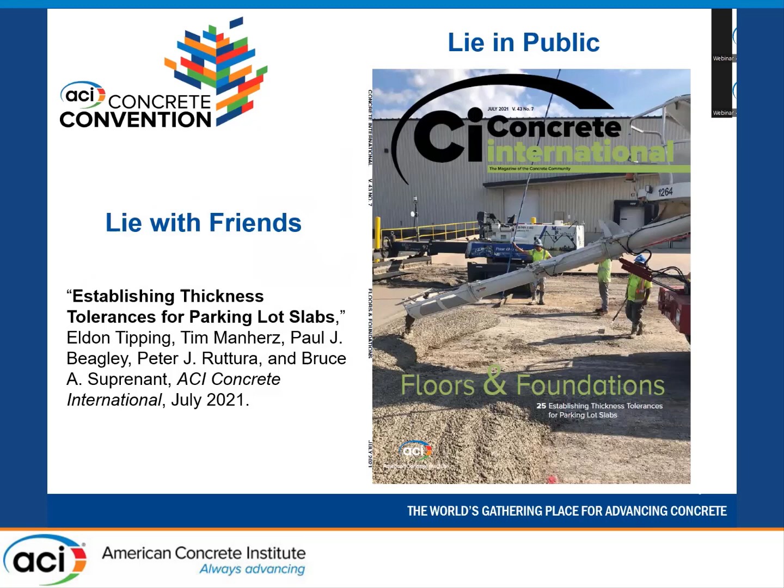Here it is. It's July 2021, all right? So if you're looking for it, that's where it is. So that's the one thing, get enough people on the article and we'll make sure we get it right here. All right. It's not lying if you show it all. There's no coincidence there's 5 people up there and there were 5 authors. So that just happened randomly.

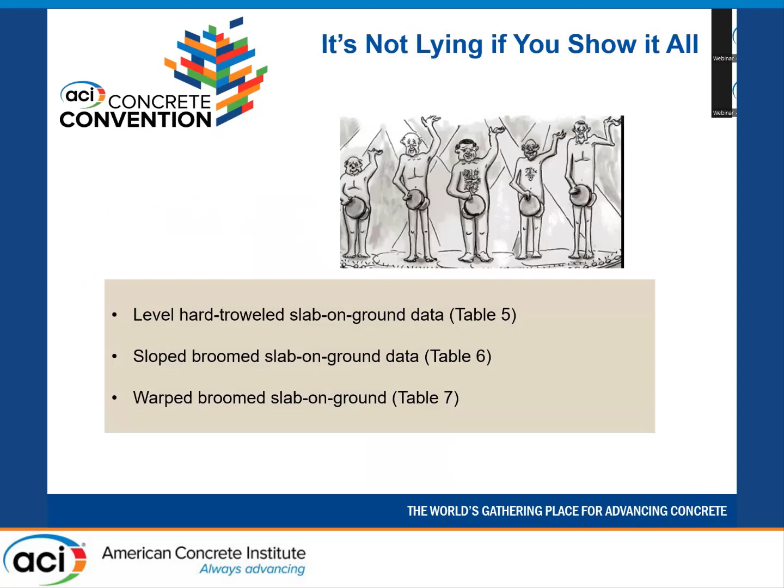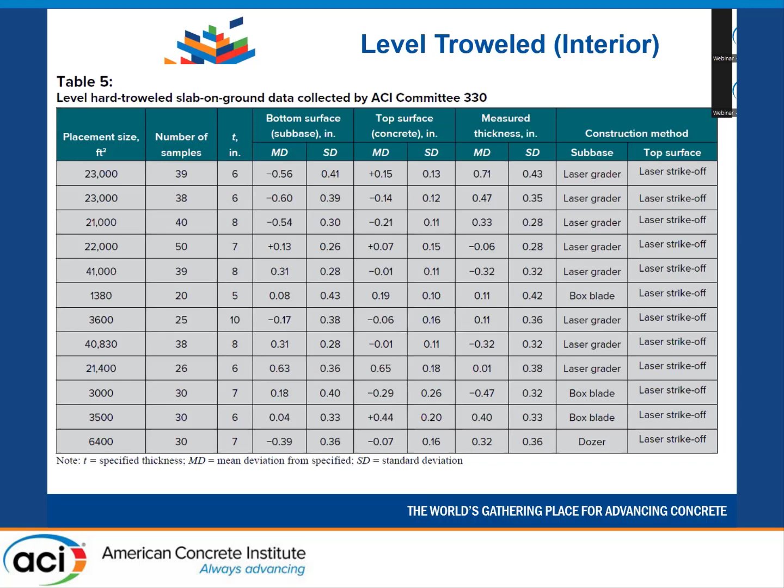But we had 3 different groups of people, and we provided the data in these tables in the ACI article. So you can go and grab the data and do to your heart's content what you'd like. Notice that, as Tim showed you, we tried to say what equipment was used at the bottom and what equipment was used at the top. So that way, if we could correlate sometime with something that happens there, we might have an opportunity.

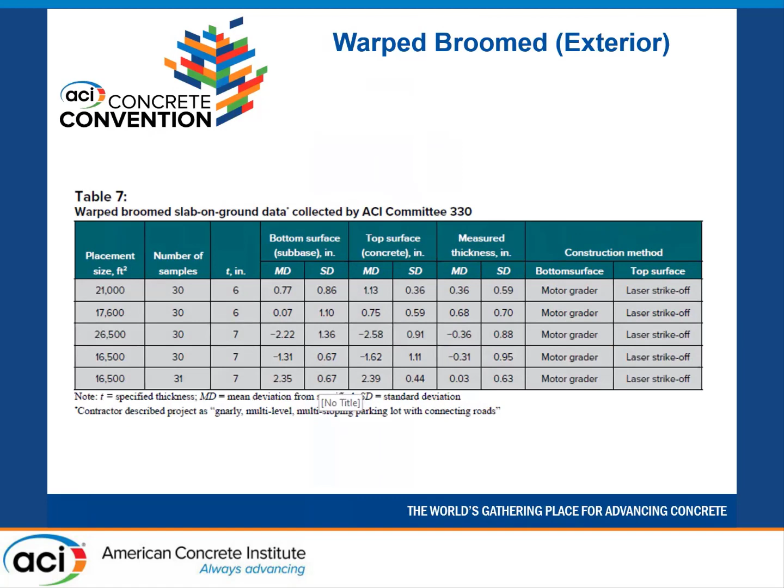Here's the one for the slope paving, slope broom, and then the warped one. We didn't have as many samples on the warped one. Jim Cornell showed you some data earlier. It matches pretty close with his data. And here's a summary of it. How many measurements, what the thicknesses were, standard deviations and averages.

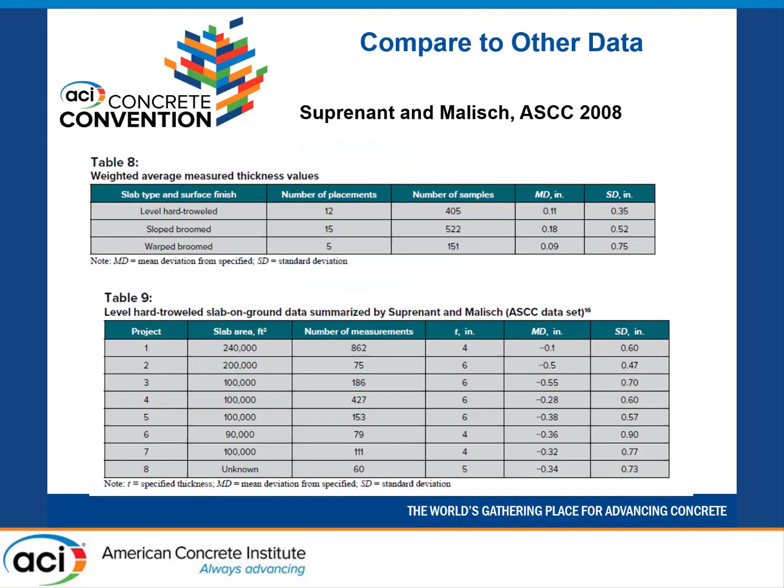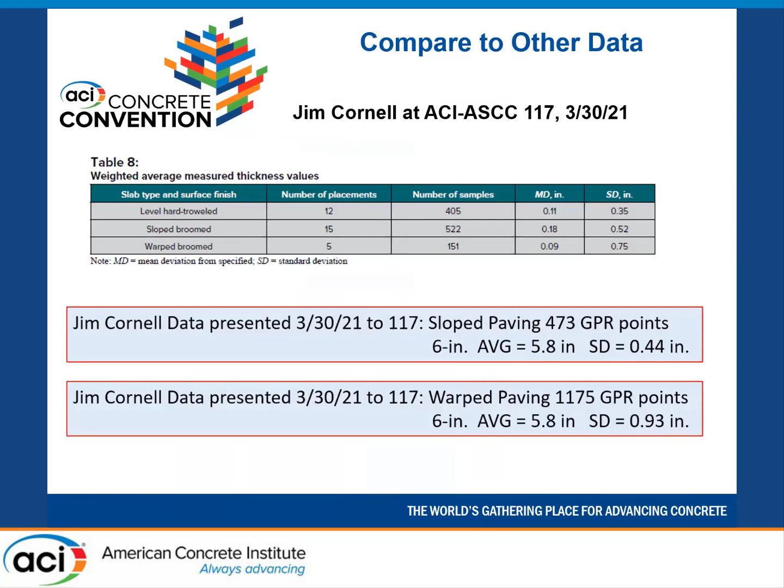Our problem is, okay, if 250 is the minimum, we have a pay penalty, we can get you there. You have to be willing to pay for an extra ½ inch. So we have contractors that are saying, when they say the word minimum, you want minimum 6 inches? All right, well, we're going to have to average 6 3/4. So you got to pay for an extra 3/4. And then everybody says no. So they want a minimum thickness, but they want the average thickness at the same time. That's never really going to work.

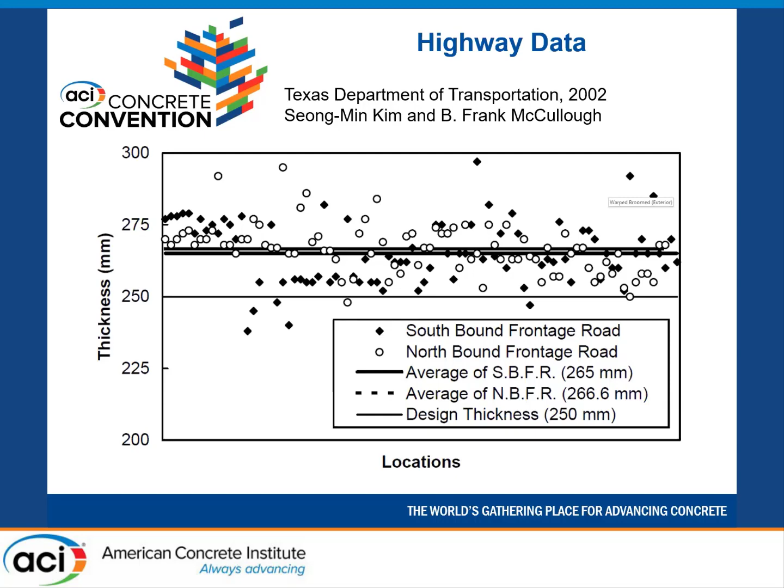Notice on the points, the scatter of the points, we'll look at what we've got here. Their standard deviations aren't much different than ours in parking lots. It's the same variability of workmanship. The difference is they get paid for an extra ½ inch or 3/4 inch of concrete. And everybody's willing to bid it that way. And the owners, our tax dollars, are willing to accept it that way.

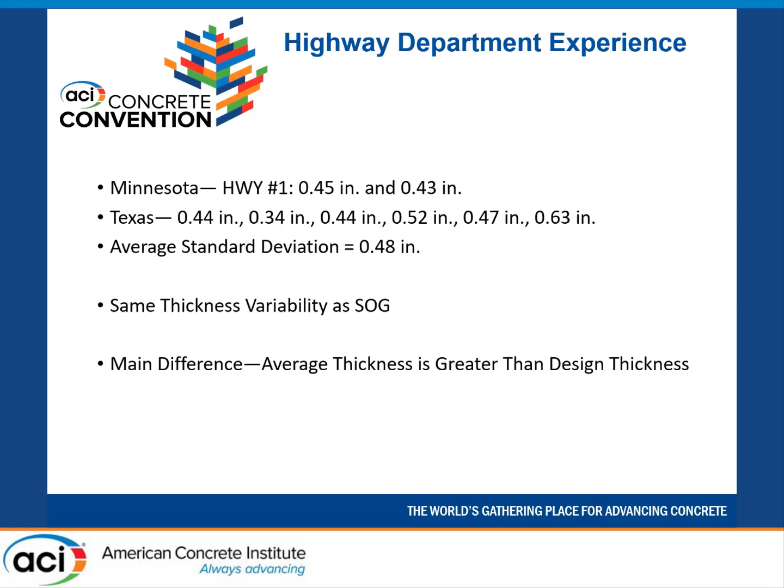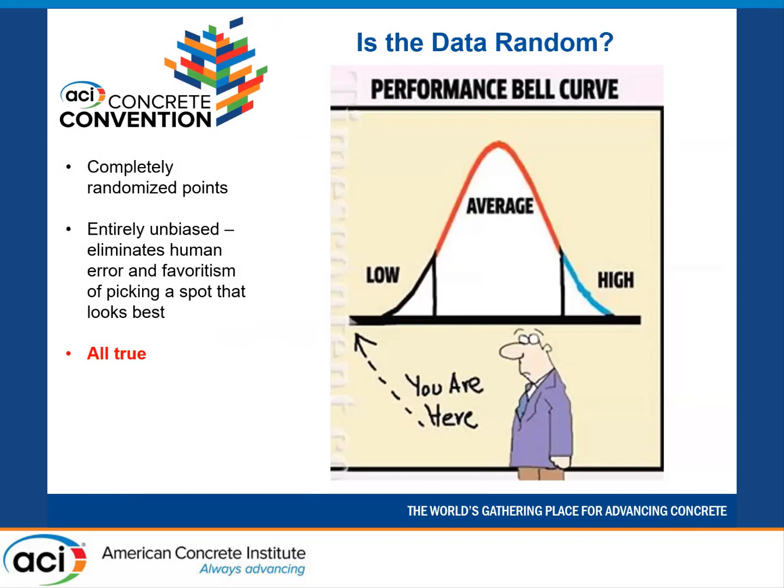So if we're willing to do that on parking lots, great. But we can't find owners that are willing to pay for it. So that's where our issue comes in. And so we're matching what is being done out there. So this is just a summary of the 3 different sections there. How we decided to now analyze it. So this is one of our problems.

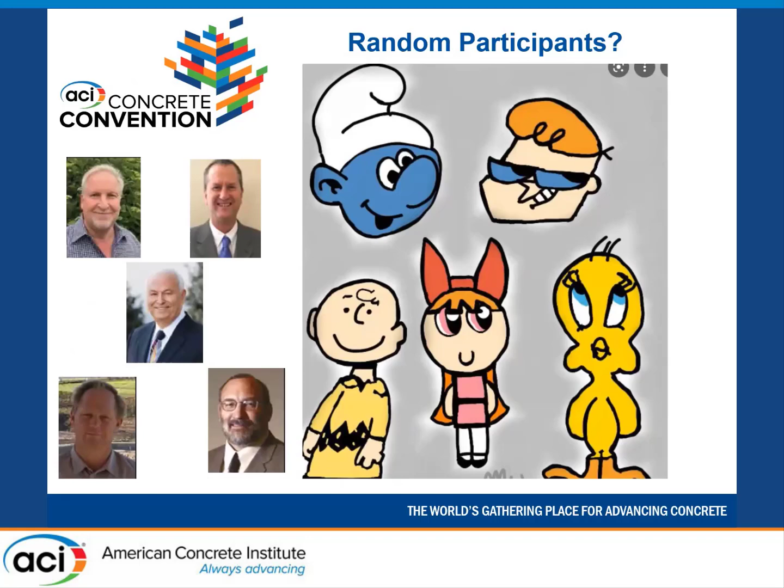And I already talked about volunteer, convenience, and random sampling. And here's the random participants. And that's when you know you're in trouble, when you've got volunteer sampling from the group. All right, so this is what we thought was happening here. We thought we were receiving information: fair, good, very good, excellent. All right. And now I'm sitting there going, how are we going to analyze this mess?

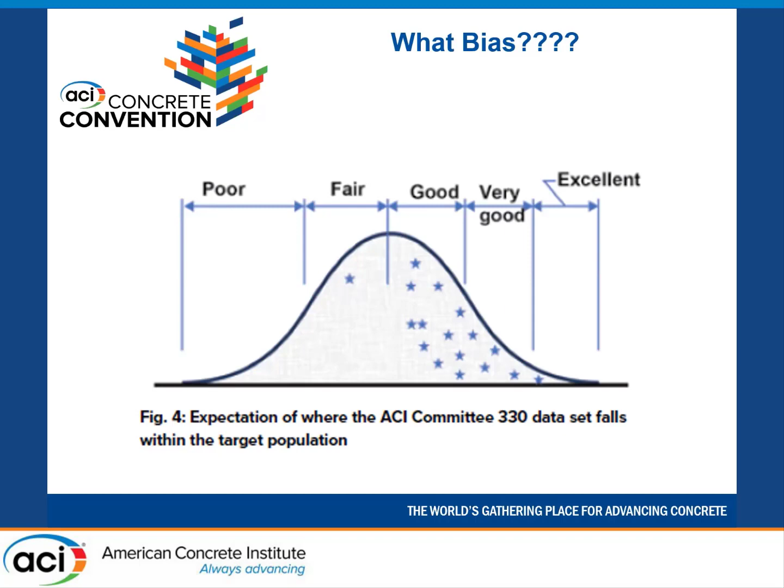And so there was one opportunity out there that I know in an ACI document that has excellent, very good, good, fair, and poor, right? And so it was like the light kind of came on and said, well, we need to go ahead and follow the ACI 214 approach. ACI 214 in their testing and analysis has the categories of excellent, very good, good, fair, and poor.

So it seemed like it would be better to try and group those categories as to what that might mean than to try and take a full statistical approach and then throw it out there and say, all right, everybody that's doing slab on ground must meet what all these contractors of ACI 330 that are on 117, 302, all these guys have been doing for 20 or 30 years.

That didn't seem quite right. Now, having said that, as I told you earlier, ASCC has bought an impact echo to start testing others. All right. They don't have to be members of ACI 117 or ACI 302 or ACI 330. We're not sure that we've collected all the data that we need.

But what we did was put out the data that we had and put out the rationale for where we went. And as we collect more, hopefully a year from now, when we have, let's say, 50 more projects and 5,000 data points, we can come here and say, we need to tweak this to the left or to the right. And here's the group we have.

Will we have a random sample again? Now we're probably going to have volunteer samples, because if you're a member of ASCC, you call up and say, ship me the impact echo, you get it. I don't know, that's not random, is it? And they're going to pick a project that's probably not random. So it's not that these issues are going to go away, but they have been done a lot of times.

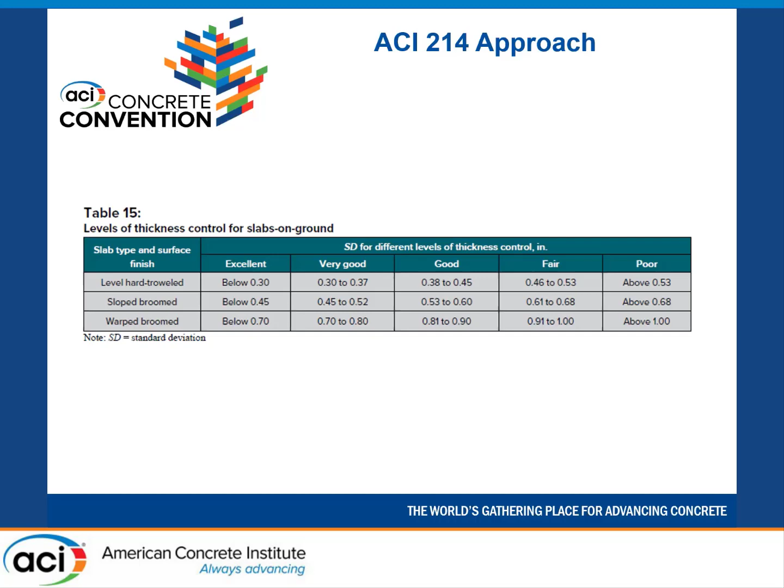Those 6 teachers, were they chosen randomly? Nope. They were volunteered. And what are they choosing for their classrooms? And so it does sit out there as a group of science. You just don't get it in too many engineering books. So we went this way with excellent, very good, good, fair, and poor. And then we went with choices as to what we think might work. Jim Cornell mentioned that earlier.

This was presented to ACI 117 on a Zoom webinar. Some of it's being balloted. There's some, what do I want to say? There's some that voted affirmative, and some have voted affirmative with comment, and some voted negative. Shocked in the ACI world. So ACI 117 is addressing these comments now, and we'll see where it's going.

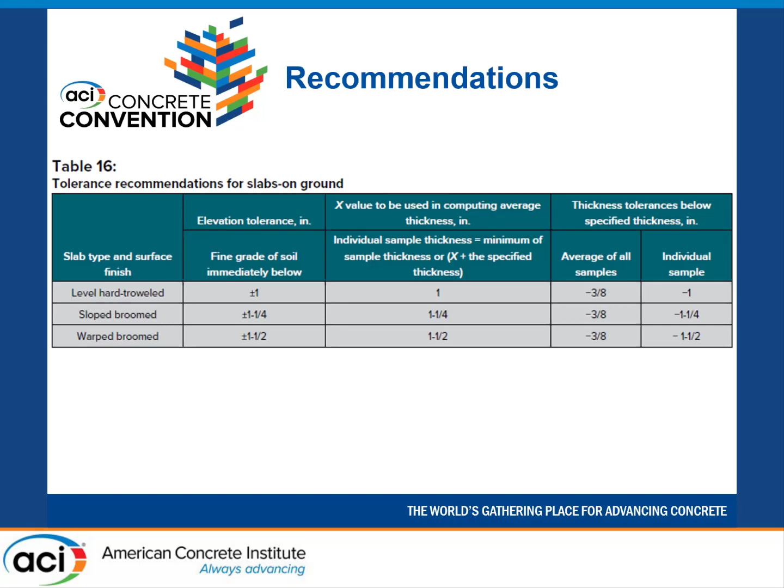And I think this is the next slide, as a follow-up to this, ACI 330 just had a vote a few weeks back, maybe a month back. They're coming up with the new specification. They voted in ACI 330 in their new specification that will go to TAC and then obviously out for public review. They voted to use the tolerances in ACI 117 as they exist, because the point was, you can't go ahead and reference a future ACI document that doesn't exist.

So we will see from ACI 330 on their specification the information that was in 2006, 2010 that was reapproved in 2015. Now, it still has to go out to TAC and public comment, and we could make a public comment maybe at that time if 117 has balloted and gone through the same process. So we're stuck a little bit.

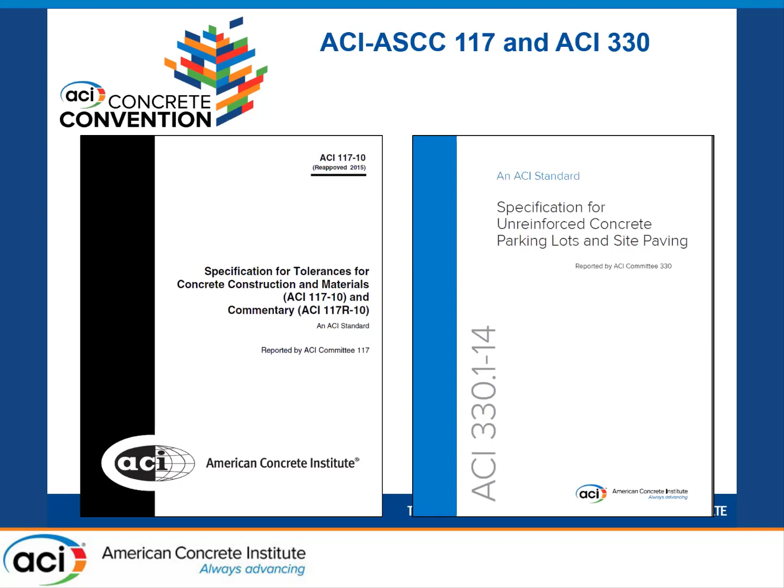My comment to 330 was, go ahead and put in what you want to put in. I don't think you want to go ahead. We're going to have to live with these tolerances for the next 10 years until you come up with a new 330 specification and can reference the new ACI 117 that's coming up. So everybody should recognize that the way we're heading down the future is we're repeating the past. That's it. Eldon.

Yeah, I have one quick comment about the excellent, very good, good, fair, and poor. If designers are going to be choosing which of those tolerances or standard deviations apply, they're going to have a hard time explaining to their owners why excellent is not what should be used for their project.

Yes, so we used excellent, very good, good, fair, and poor, but when we recommended tolerances, you might not be surprised that we did not base them off excellent. They're not based off excellent, very good, or good. It looked like what ACI 214 was willing to accept as fair, so we based them off that. So we're saying we're choosing the fair column out of what we consider to be industry experts.

Good point. Thank you. However, we do not want somebody, if you want to choose the standard deviation for excellence, we're talking about a very minimal group who will get you there. And they won't get you there every time either.